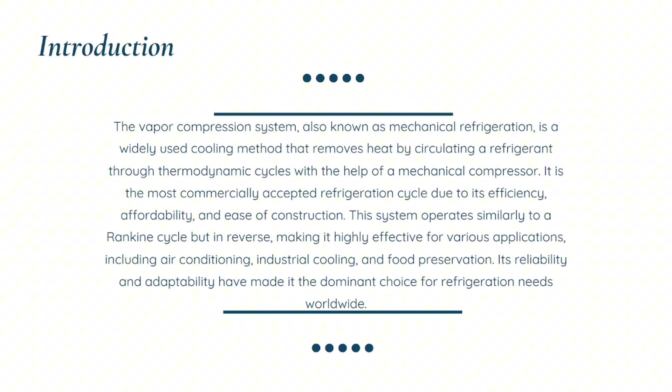These systems operate similarly to a Rankine cycle but in reverse, making it highly effective for various applications including air conditioning, industrial cooling, and food preservation. Its reliability and adaptability have made it the dominant choice for refrigeration needs worldwide.

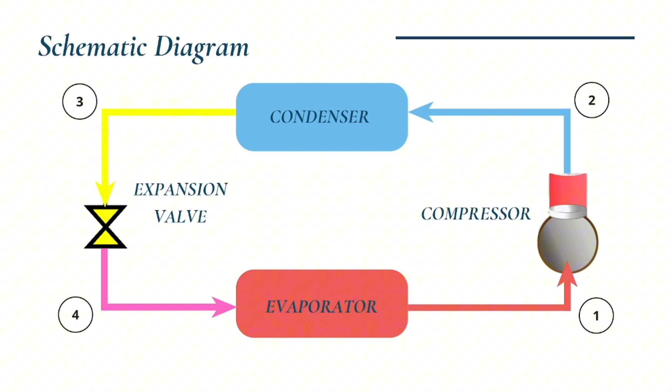Now, let me show you the schematic diagram for the vapor compression cycle: evaporator, compressor, condenser, then expansion valve. For the P-h and P-V diagrams, you can see here the P-h diagram on the left side and the P-V diagram on the right side.

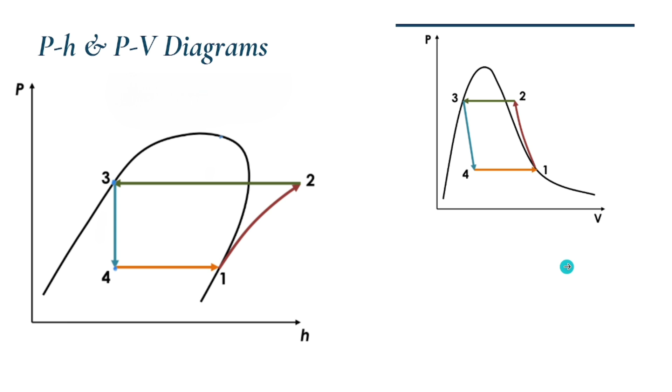Process 1 to 2 is a reversible adiabatic compression. Process 2 to 3 is a reversible rejection of heat at constant pressure. Process 3 to 4 is an irreversible expansion at constant enthalpy. Process 4 to 1 is a reversible heat addition at constant pressure.

In point 1, makukuha mo yung H1, which is equal to Hg at temperature 1 or pressure 1, which also equals pressure at point 4. In point 2 naman, makukuha natin yung H2, which is equal to H at temperature at point 2 and pressure at point 2, which is also equal to the pressure at point 3.

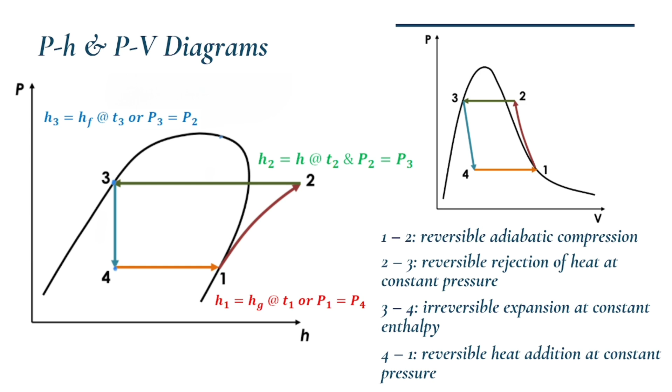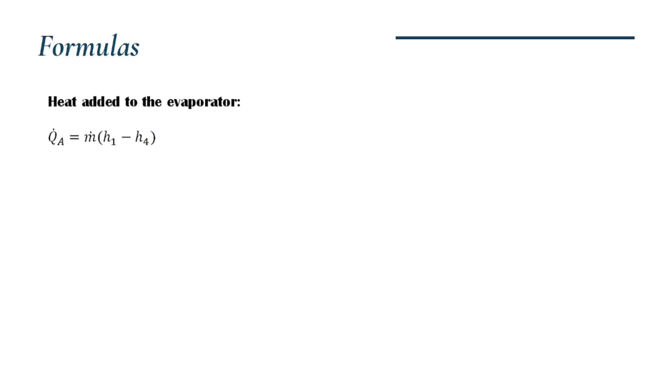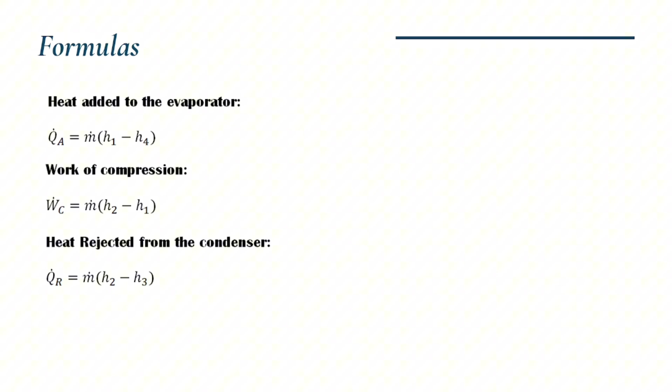And this is H4. For the formulas naman, we have heat added to the evaporator: QA equals mass flow rate times H1 minus H4. For the work of compression, we have WC equals mass flow rate times H2 minus H1. For the heat rejected from the condenser, we have QR equals mass flow rate times H2 minus H3. For the enthalpy at the expansion valve, H3 equals H4.

For the flash gas x, or fraction of vapor, we have H4 minus HF4 all over HFG4. For the coefficient of performance naman, we have COP equals heat added all over work of compression, which also equals H1 minus H4 all over H2 minus H1.

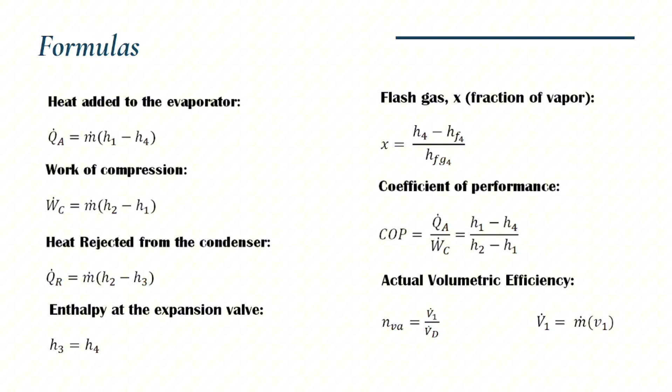For the actual volumetric efficiency naman, we have NVA equals volume flow rate V1 all over VD, which is volume displacement. And para makuha yung V1, we have mass flow rate times specific volume. And for the displacement volume naman, we have L, A, N, and small n.

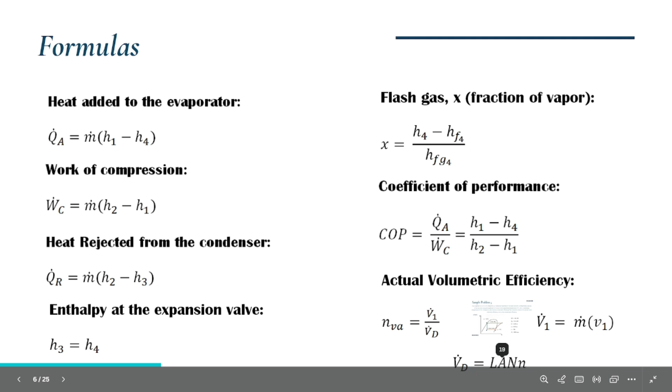For this L, it is the stroke. For the A, which is the area of the cylinder, ang formula nun is pi over 4 D squared. For the N naman, it is the speed. And dito sa small n, may kasama pa siya. Ang magiging formula niya is nc times na. Yung nc is the number of cylinders, yung na is the number of acting.

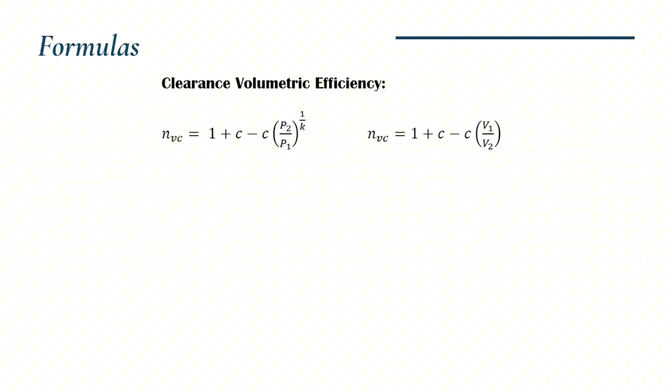Next, clearance volumetric efficiency. NVC equals 1 plus C minus C times P2 over P1 raised to 1 over K. The other formula is 1 plus C minus C times V1 over V2. Yung P2 na to, tsaka V1, equals lang siya.

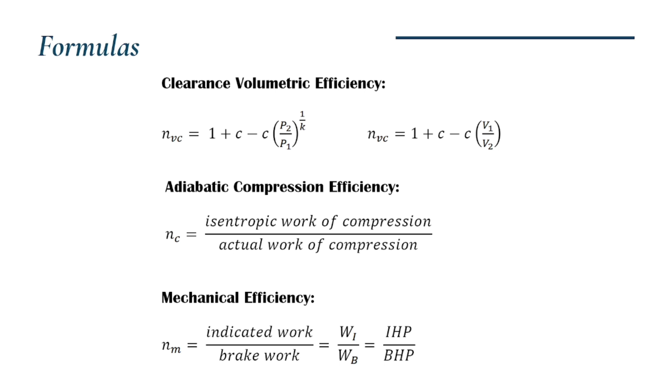For adiabatic compression efficiency naman, we have NC equals isentropic work of compression all over actual work of compression. For the mechanical efficiency, we have Nm equals indicated work all over brake work.

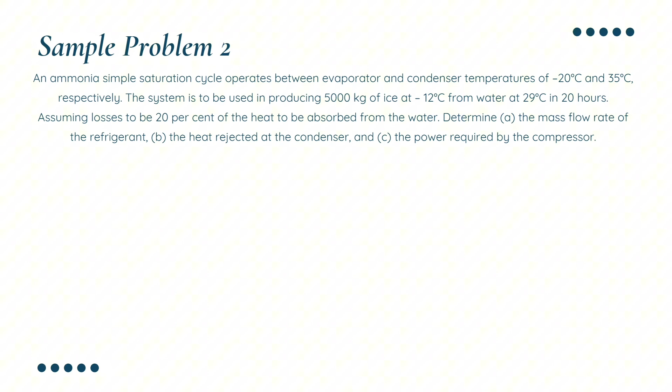For sample problem 2, an ammonia simple saturation cycle operates between evaporator and condenser temperatures of -20 degrees Celsius and 35 degrees Celsius respectively. The system is producing 5,000 kilograms of ice at -12 degrees Celsius from water at 29 degrees Celsius in 20 hours. Assuming losses to be 20% of the heat to be absorbed from the water, determine the mass flow rate of the refrigerant, the heat rejected at the condenser, and the power required by the compressor.

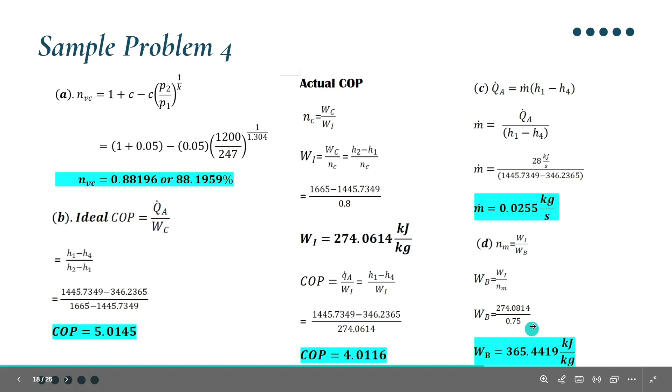So, ang mechanical efficiency is equal to actual work over brake work. Para makuha mo ang brake work, papagpalitin mo ulit yun sa ibaba. So, actual work, which is yung kaninang nakuha mo, 274, and ang mechanical efficiency, makuha mo na ang brake work na 365.4419 kJ/kg.

Sample problem 5. A 6-cylinder, 6.70 times 5.70 centimeter refrigerant 22 compressor operating at 1,800 RPM indicates a refrigerating capacity of 96.4 kilowatts and a power requirement of 19.4 kilowatts at an evaporating temperature of 5 degrees Celsius and a condensing temperature of 35 degrees Celsius.

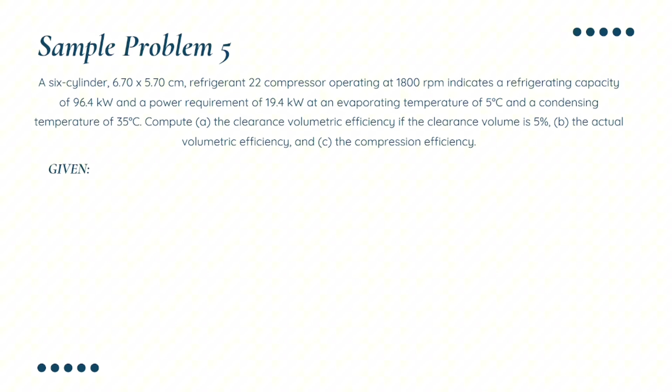T1 equals 5 degrees Celsius, pressure ng evaporator is 0.58432 MPa. Temperature 3 which is 35 degrees Celsius and pressure ng condenser which is 1.3441 MPa. Pakita ko mamaya kung saan kinuha tong pressure.

Ito ang given. Other given which is power which is 19.4 kilowatts, heat added which is 96.4 kilowatts, and diameter which is 6.70 centimeter. Length equals to 5.70 centimeter and clearance volume which is 5%. Speed which is 1,800 RPM.

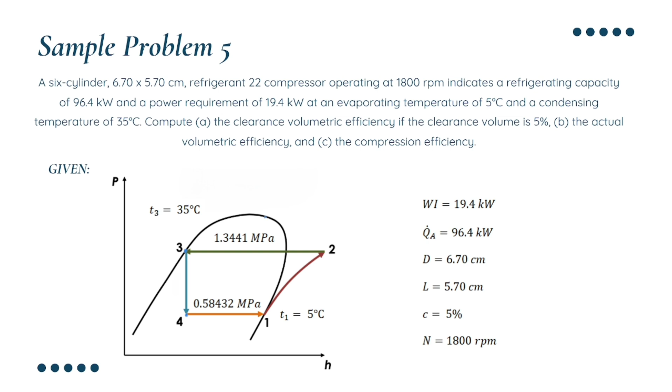Solution. At point 1, using refrigerant 22 tables, sa 4 and 6, wala tayong 5. Ang ginawa dito, nag-interpolate tayo.

Makukuha natin yung H1, which is equals to Hg at 5 degrees Celsius, equals to 406.85 kilojoule per kilogram. Yung entropy naman natin, S1 equals to Sg at 5 degrees Celsius, equals to 1.7436 kilojoule per kilogram Kelvin, which is also equals to S2. Yung specific volume at vg at 5 degrees Celsius, makuha natin which is equals to 0.04036 cubic meter per kilogram.

At point 2 naman, using pH chart of refrigerant 22, gagamitin natin yung given na 35 degrees Celsius and yung S2, makuha natin yung H. Dito, nakuha natin yung H gamit yung nagline tayo ng 5 degrees Celsius sa temperature and 35 degrees Celsius, at ginamit natin yung S2 which is nasa 1.7 and 1.74.

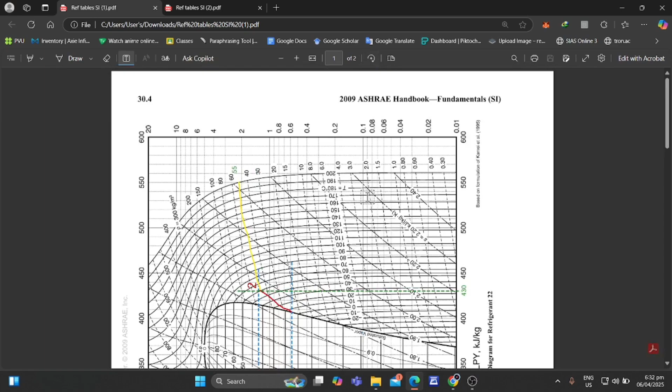Using refrigerant tables ulit, ito 34, 36, ang value natin na dapat is 35. Ito yung pressure kanina sa 35, nakuha natin yung pressure doon, gamit to.

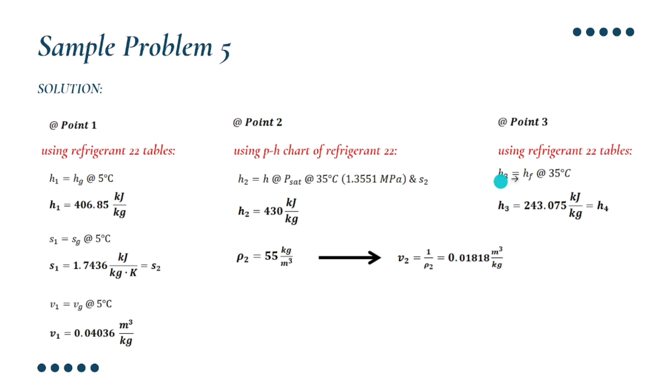Tapos, makukuha natin yung enthalpy sa liquid naman, yung hf. Nakuha natin yung value na 243.075 kilojoule, at equals ang H3 sa H4.

So for the solution, by using the given and the formula discussed earlier, ang nahanap sa A is clearance volumetric efficiency. Ginamit natin yung formula na 1 plus C minus C times specific volume 1 all over specific volume 2.

And substitution of the given, substituting the given, nakuha natin yung clearance volumetric efficiency which is 93.8999%.

So sa actual volumetric efficiency naman, ginamit natin yung V1 over VD. Dahil wala tayong V1, ginamit natin yung mass times specific volume 1 all over VD.

Para makuha natin yung mass flow rate, gagamitin natin yung heat added na formula. Since may given tayo ng heat added, makuha natin yung mass flow rate. So by deriving the formula, makuha natin yung QA all over H1 minus H4.

Substitution of the given, makuha natin mass flow rate na 0.5886 kg per second.

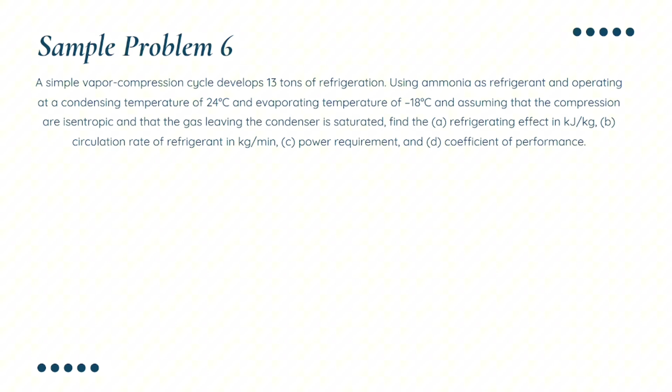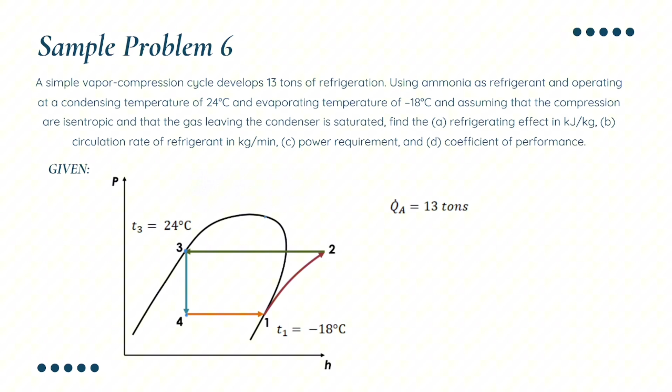in kilojoule per kilogram, circulation rate of refrigerant in kilogram per minute, power requirement, and lastly, coefficient of performance. So sa given, we have pH diagram, T1 which is equals to negative 18 degrees Celsius, T3 equals to 24 degrees Celsius, and heat added which is equals to 13 tons of refrigeration.

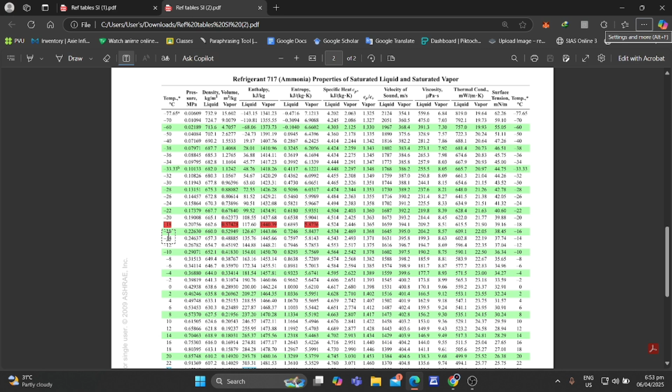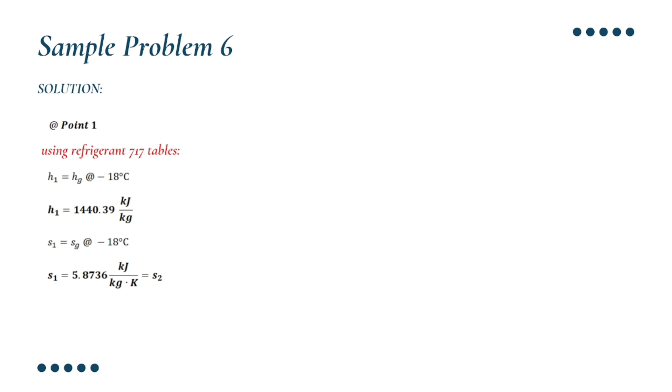And point 1, using refrigerant 717 tables at negative 18 degrees Celsius, makuha natin yung, ito yung refrigerant 717. Dahil sakto yung negative 18, hindi natin kailangan mag-interpolate. Specific volume, enthalpy, and entropy. And by using the tables, makuha natin H1, S1, which is also equals to S2, and specific volume 1.

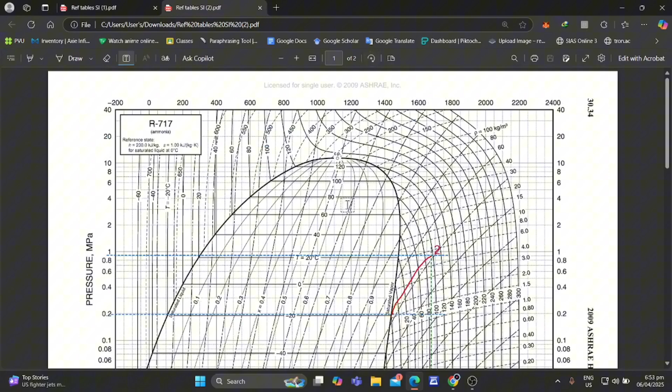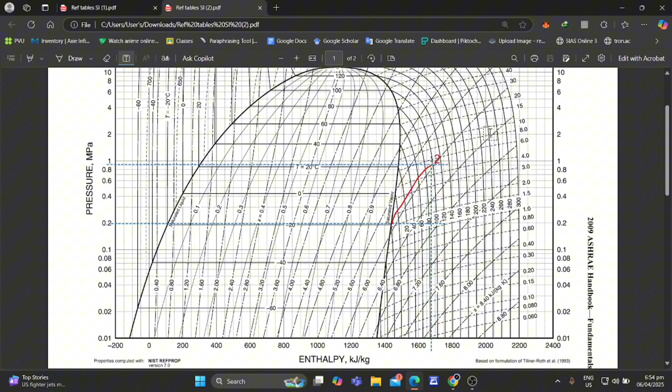Here, by plotting that negative 18 degrees Celsius and 24 degrees Celsius, makukuha natin yung, and using the S2, makukuha natin yung 1,660 na enthalpy. Kasi ito, 1,650 to, ito, 1,700. So nag-assume tayo dito na ito yung 1,660. Makukuha natin yung enthalpy ng 2, which is 1,660 nga.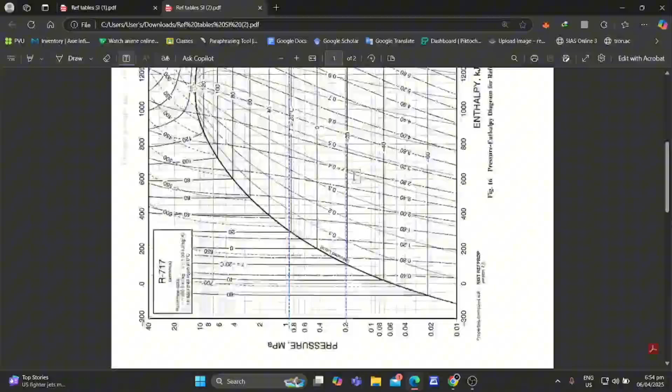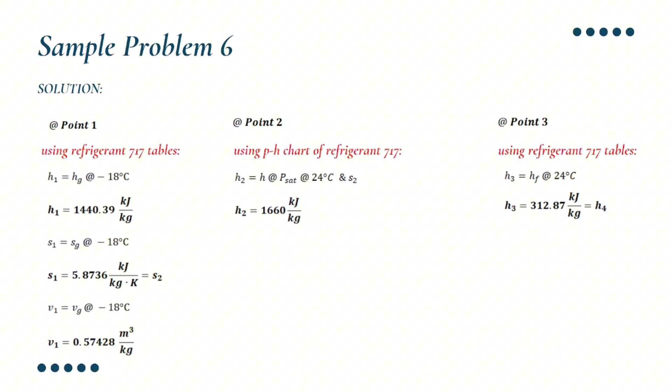At point 3 naman, using refrigerant 717 table ulit, here, makita mo yung 24, sakto ulit, hindi na natin kailangan mag-interpolate. And enthalpy ng liquid is 312.87, which is nakuha natin sa H3 siya, which is also equals to H4.

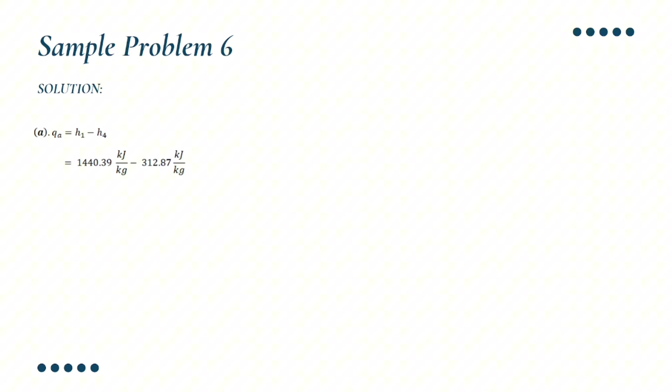So kunin natin yung solution. QA equals to H1 minus H4 equals to... Substitute lang yung given natin, makuha natin yung 1,127.52 kilojoule per kilogram. And yung heat added naman is mass flow rate times H1 minus H4.

At dahil yung H1 minus H4 nga, yung maliit na QA, ginamit na lang natin dito para mabilis. And interpolation lang para makuha yung mass flow rate. At nakuha na natin mass flow rate natin, which is 2.4328 kilogram per minute.

And compression work, makukuha natin substitution, and makukuha natin compression work is 534.2672 kilojoule per minute or 8.9045 kilowatts.

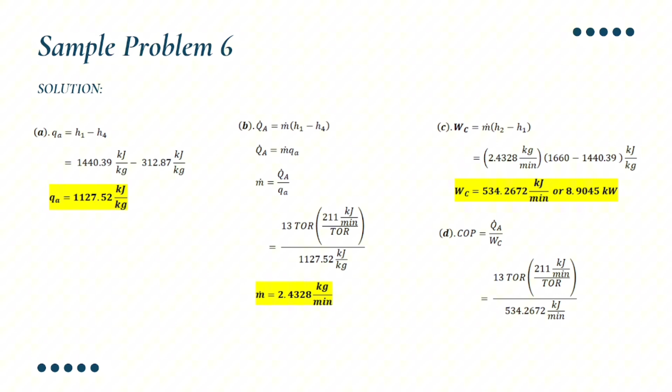At para makuha natin COP, we have QA and work compression. 13 TOR, 211. At dito pala, ginamit natin yung 211 kilojoule per minute, which is also equals to 1 TOR. Kinonvert natin siya para maging kilojoule per minute. Para magkaroon ng cancellation ng unit.

At dito, ginamit natin itong 534 para hindi na tayo pag-convert pa. Ito lang i-convert natin, 13 TOR. Nakuha natin yung COP na 5.1341.

And that's all for the vapor compression cycle. Thank you.